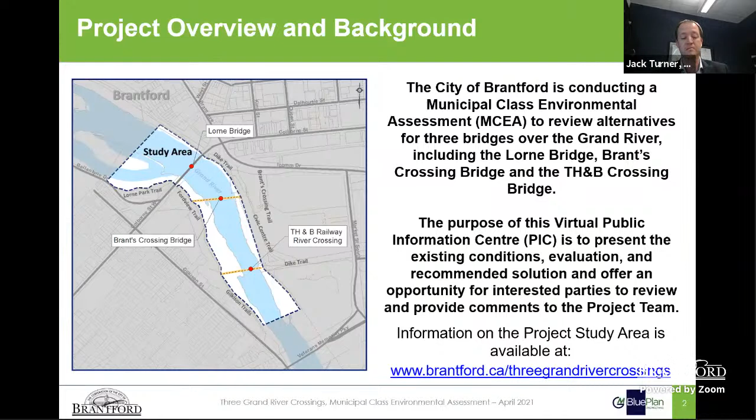The 3 Grand River Crossing study is being undertaken as a Schedule B Municipal Class Environmental Assessment, a planning process under the Ontario Environmental Assessment Act. The primary goal of the study is to minimize, mitigate, and avoid impacts on the community and surrounding area.

Phase 1 of the process is to identify the problem and opportunity. Phase 2 involves completing an inventory of the environment, developing and evaluating feasible alternative solutions, and identifying a recommended solution. We are currently nearing the end of phase 2 with this second PIC. The recommended solutions will be presented in more detail later on in this presentation.

Following the second PIC, we will consider feedback received and identify a preferred solution, followed by a presentation to City Council, at which point the project team will review and confirm the choice of the Class EA project schedule. Next, we will review the 3 bridge structures within the study area.

The first is the Lorne Bridge, located on Colborne Street West, made of 3 distinct sections. The most easterly section is the Lorne Girder Bridge over the former railway corridor. The middle section is the Lorne Arch Bridge and is the predominant structure that crosses the Grand River. Of the 3 crossings included in this Class EA, the Lorne Bridge is the only one that permits vehicular traffic.

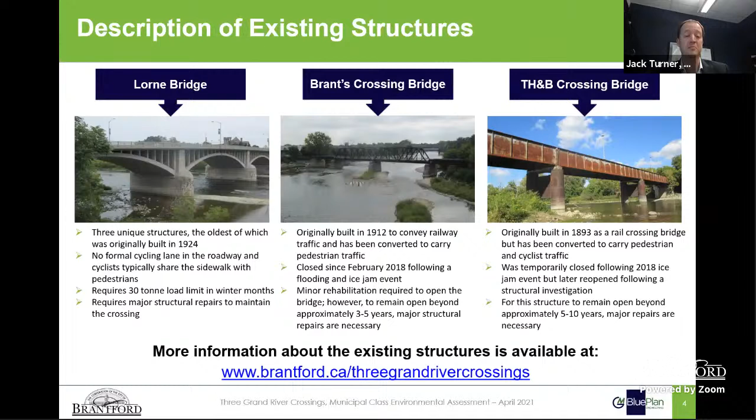In the following slide, we will review the project objectives. This study was initiated to identify long-term solutions that address the deteriorating state of the existing structures and the vehicular and active transportation connectivity needs in the area. The key objectives of the study are to consider a reasonable range of potential solutions, to consider impacts to all aspects of the environment, including the social, natural, technical, and economic environments, and select a preferred solution through a transparent decision-making process that encourages public participation throughout.

The problem being studied here is that the structural investigations have identified the need for structural repairs of various magnitudes to each of the 3 Grand River crossings. This study is exploring the feasibility of removing the winter load limit on the Lorne Bridge, the need for one or both of the Brant and TH&B crossing bridges, all based on an assessment of the technical, economic, social, and natural environmental factors, including impact to active transportation network and the risks of future flooding events of the Grand River. The city requires both short-term and long-term plans for the 3 Grand River crossings.

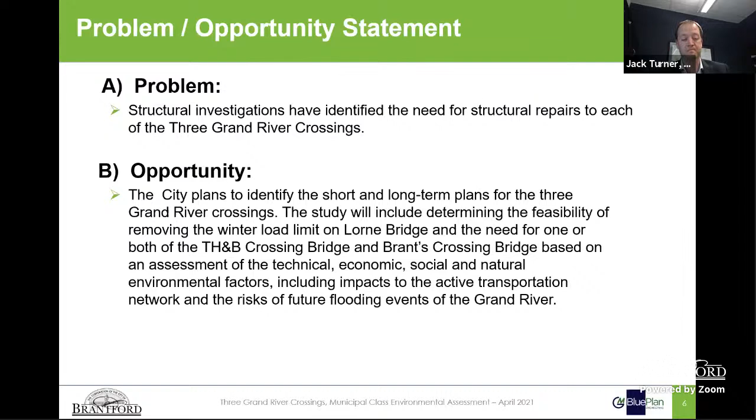Now we will look at a few high-level summaries of various background information studies. On this slide, we can see some of the key archaeological and cultural heritage information. The Stage 1 archaeological assessment identifies areas where a Stage 2 archaeological assessment study would be required if that area may be disrupted by construction. A Stage 2 study confirms if there is likely to be any significant buried archaeological importance. From the figures shown, if foundations were selected to be placed with disturbances in any of the brown or green locations, a Stage 2 archaeological study would be required. This will be reviewed later on in the presentation during discussion and assessment of the various alternatives for each bridge.

This slide also illustrates some of the local locations of cultural heritage landscape features, such as the Lorne Park, the Brantford Armory, the Boer War Monument, the Brant County War Memorial, various historical rail lines, the Lake Erie and Northern, or the L-E-N bridge abutments left in place, and the presumed line of Joseph Brant's crossing of the Grand River.

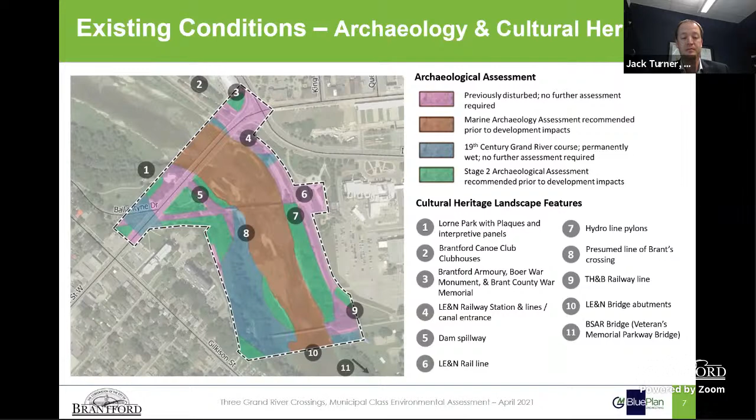On this slide, we will review the study on the natural environment. The Grand River is a significant valley land and regional wildlife corridor. It is home to many wildlife species, including many birds, including the common nighthawk, the eastern wood pewee, and waterfowl, among many others. Additionally, there is habitat in the study area for species of special concern and endangered species, such as the snapping turtle, 3 at-risk bat species, the queen snake, and the chimney swift.

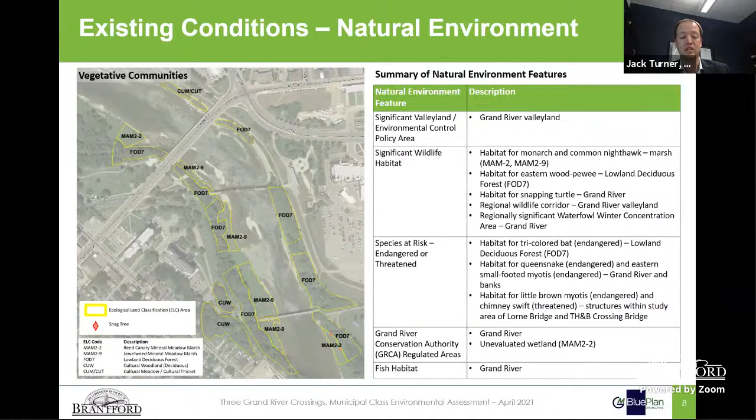We'll now go over some of the more technical conditions, most notably the river hydraulics. The February 2018 flood and ice jam event may still be fresh in everyone's mind. A hydraulic impact study was completed to assess flooding behavior of the Grand River within the study area for both open water flow in the absence of ice and also ice jamming events.

The results of the study found that the Lorne Bridge can convey the various design storms, and they were limited to no hydraulic improvement opportunities. However, as was seen during the 2018 flood event, the Brants Crossing and the THB Crossing bridges are lower than the Lorne Bridge and can become submerged during flood and ice jamming events. Raising the two pedestrian bridges by approximately 0.8 meters will pass the regional storm that is based on Hurricane Hazel that occurred in 1954. However, it should be noted that even raising the bridges do not eliminate the chance of flood damage on the structure. However, it significantly reduces the likelihood. Additionally, raising the structures will not significantly lower flooding events that reach the current soffit of the bridges.

Next, we will review the evaluation framework presented in the first public information presentation.

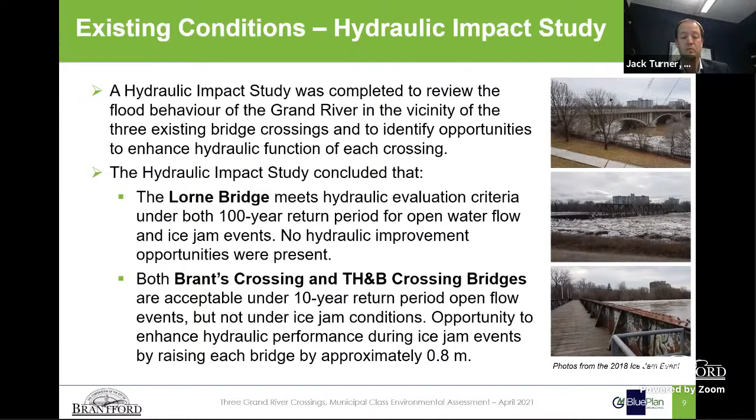So now that we have described the existing area, we will move on to the next steps and discuss the alternative solutions and the evaluations of those solutions.

This slide was presented in the first Public Information Center and describes the evaluation framework for developing, screening, evaluating, and ultimately identifying the recommended solution for all crossings located within the study area. A list of alternative solutions for each crossing was discussed in that first PIC. After receiving feedback from the public and other stakeholders and the completion of all the background studies of the various environments, each individual crossing's alternative solutions were screened for feasibility to satisfy the study objectives reviewed earlier in this presentation.

From there, shortlisted individual crossing solutions were combined to create a list of overall crossing strategies for the study area. Each overall crossing strategy was then screened for feasibility against the study's objectives. Finally, a detailed evaluation of each feasible overall crossing strategy was completed, ultimately leading to the selection of the recommended strategy for the 3 Grand River crossings.

We're now going to focus on the detailed evaluation and shortlisting of each crossing. The evaluation considered 4 criteria categories, one for each of the key environments being assessed, namely the social, the natural, the technical, and the economic environments. Some more specific criteria were reviewed for each category.

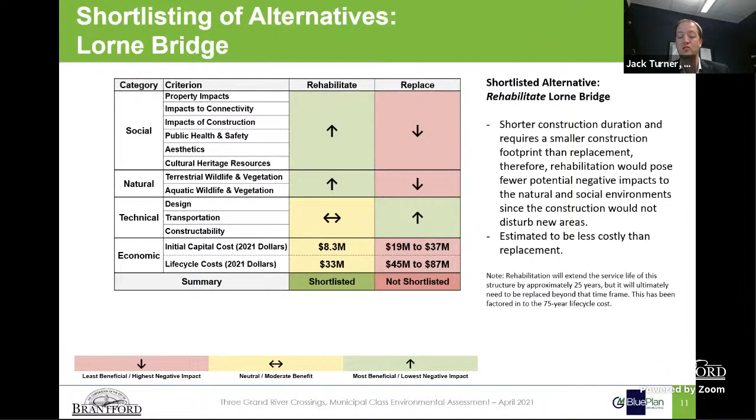Moving on to Brants Crossing Bridge, 3 overarching alternatives were considered, namely decommissioning, which would include either closure or removal; rehabilitation, which includes keeping the same height or raising the bridge by 0.8 meters; and finally, replacement. A replacement bridge would be higher than the current structure to improve river hydraulics.

Overall, decommissioning Brants Crossing was evaluated to be least favorable. Reasons include loss of connectivity, loss of cultural heritage resources, and other factors. For the Brants Crossing Bridge, the rehabilitation and replacement options were deemed to be the most beneficial with the least negative impact and were carried forward to be evaluated as a part of the overall crossing strategies.

Moving on to Brants Crossing Bridge, there are three overarching alternatives considered: decommissioning, which would include either closure or removal; rehabilitation, which includes keeping the same height or the bridge being raised higher; and replacement.

Okay, so we'll move on to TH&B here. The overarching alternatives considered for TH&B were the same as those for the Brants Crossing, including decommissioning, rehabilitation, and replacement. While the alternatives are similar to the Brant Bridge, it is understood that Brants Crossing is a more favorable crossing over the TH&B because it is in a more favorable location and has more historical value.

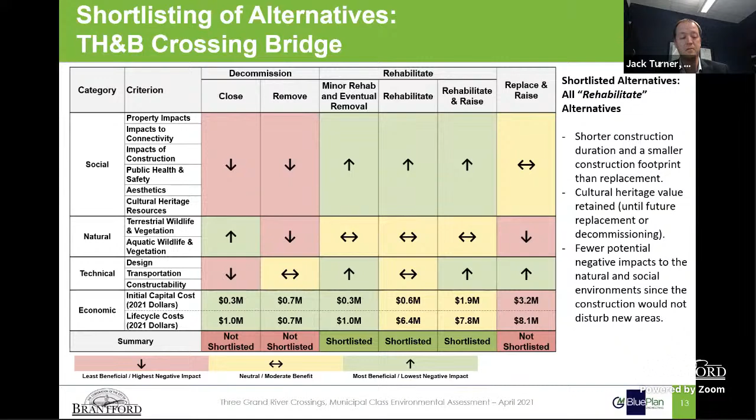Also, no new pedestrian bridge at a different location will be considered following this.

As part of the economic environment, we also evaluated life cycle costs. These are construction and maintenance costs within a 75-year time frame. For simplicity, the information here focuses on construction costs and does not show general annual maintenance costs, which are much lower in magnitude.

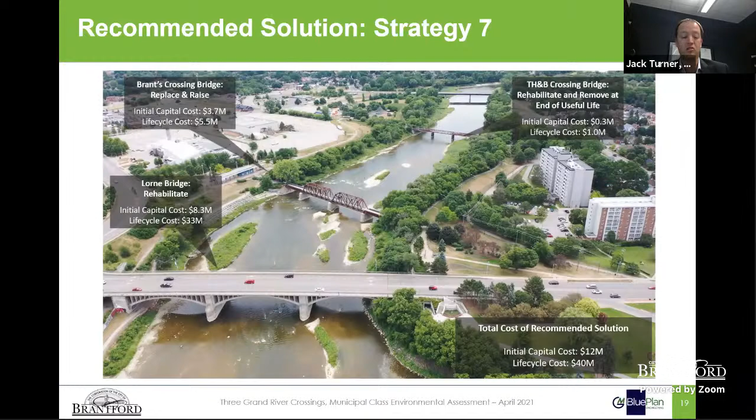The first question is, can Brant's Crossing Bridge be reopened soon? A minor rehabilitation is required in order to reopen the bridge in the short term, and could occur following the outcome of the environmental assessment. However, more extensive work is required in order to have the bridge remain open beyond approximately 3 to 5 years.

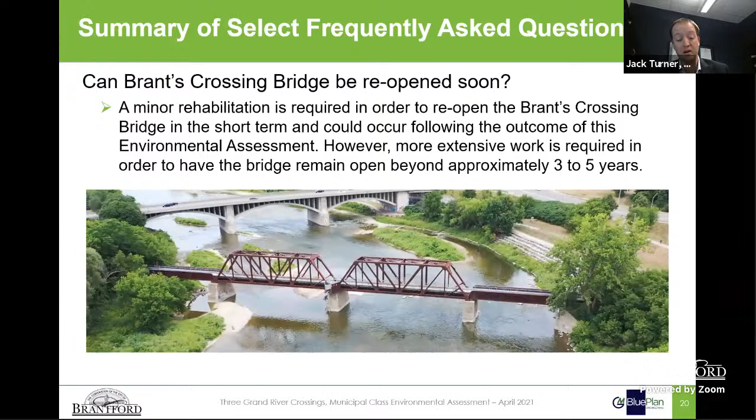Following the conclusion of this study, the City of Brantford would determine if fast-tracking the currently recommended replacement alternative would be more desirable than completing the minor repairs, which would have limited to no benefit for the new structure.

The next 3 questions relate to river flows and ice jamming. The first is: what is the history of water or ice levels rising to the underside of the Brant's and TH&B Crossing bridges? There are records available back to approximately 1965, where river water gauges indicate that in February 1996 and February 2018, the underside of the bridges were submerged. Additionally, there was an event in February 1984 which was very close to, or may actually have risen to, the underside of the bridges, but lacks any historical verification with news articles or other documentation.

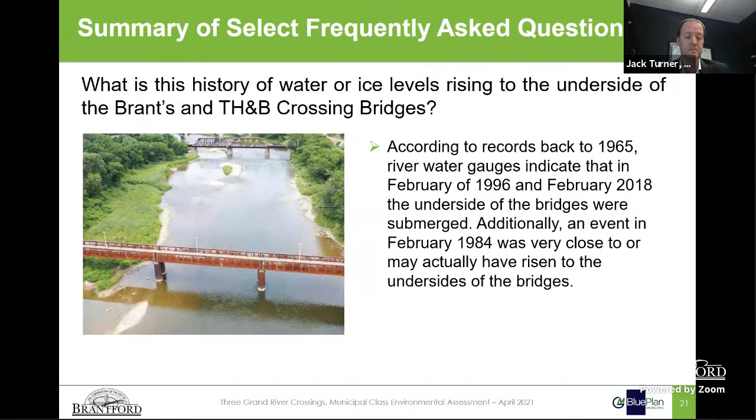The second river flow question relates to the technical term 'return period,' used to define the chances of certain severe storms occurring in a given year. What is a 100-year return period event, or a 100-year storm or 100-year flood? Do they only occur once in 100 years? A return period represents the likelihood of a storm event occurring in any given year. A 100-year return period event has a 1 in 100 chance of occurring regardless of what happened in the prior year. A 50-year return period event has a 1 in 50 chance of occurring each and every year.

The third question related to river flows is: would raising Brant's Crossing Bridge and TH&B Crossing Bridge eliminate ice jam issues and risks? Raising the two crossings by approximately 0.8 meters, as discussed earlier, would reduce the probability of ice jamming events occurring at the bridges to less than about 1% in any given year, and would substantially reduce the risk of damage to the bridges compared to the current configuration. However, this would do very little to reduce overall flooding in the area.

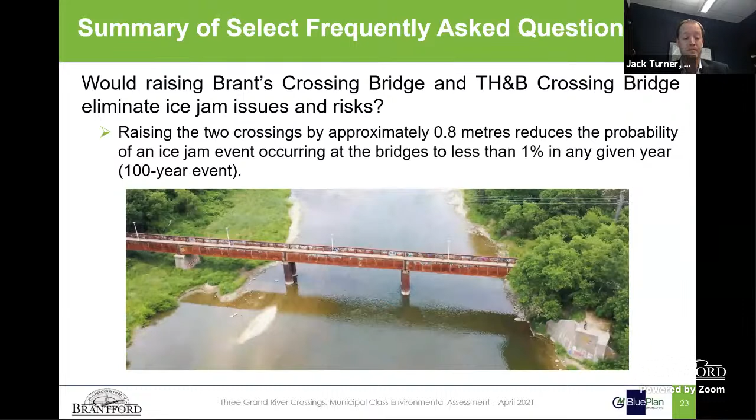The last two questions relate to active transportation. The first: there are concerns with the existing cycling facilities on the Lorne Bridge. Can Lorne Bridge accommodate dedicated cycling lanes without reducing vehicular capacity? Our answer is that the bridge deck was widened during construction works in the 1980s and cannot be further widened. Adding dedicated cycling lanes would come at the expense of reduced vehicular capacity.

For instance, there are 5 traffic lanes on the bridge, 2 lanes in each direction plus 1 left turn lane approaching Brant Avenue. To add a typical 1.5 meter wide cycling lane to each side of the bridge, one of the 5 vehicular lanes would need to be decommissioned.

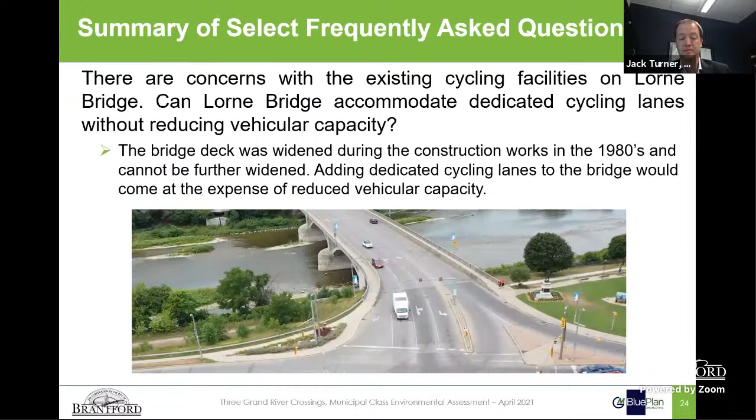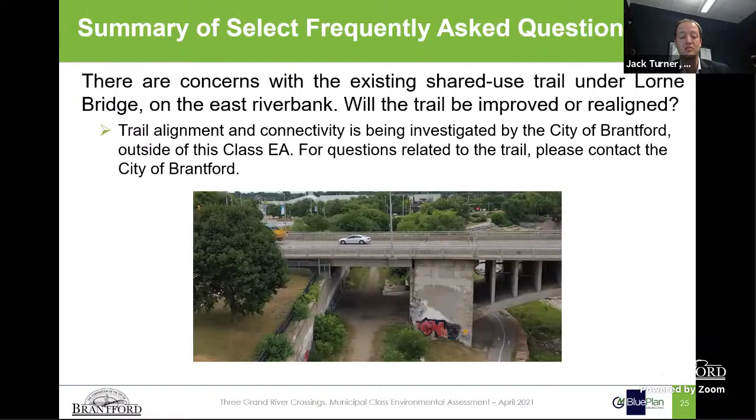The last of these frequently asked questions discussed today: there are concerns with the existing shared use trail under the Lorne Bridge on the east riverbank. Will the trail be improved or realigned? The trail alignment and connectivity is being investigated by the City of Brantford outside of this municipal class environmental assessment project. For questions related to the trail, please contact the City of Brantford.

This concludes the live presentation portion of this PIC for the 3 Grand River Crossings Municipal Class Environmental Assessment.

If you wish to submit comments or would like to be added to the project stakeholder list, please contact either Gagan Batra, the project manager for the City of Brantford, or myself, Jack Turner, the project manager for GM BluePlan Engineering. Comment sheets are available on the project website. If you require a paper copy, please request one from either Gagan or myself. Comments submitted by April 15th will be considered for the frequently asked questions list posted on April 22nd. It is preferred that requests to be added to the stakeholder list be sent by email, and any questions and comments on the PIC material be submitted electronically via the project webpage. However, if this is not possible, providing feedback by phone or mail will be received. Once again, thank you for participating in this virtual presentation, and I will hand it back to Gagan.